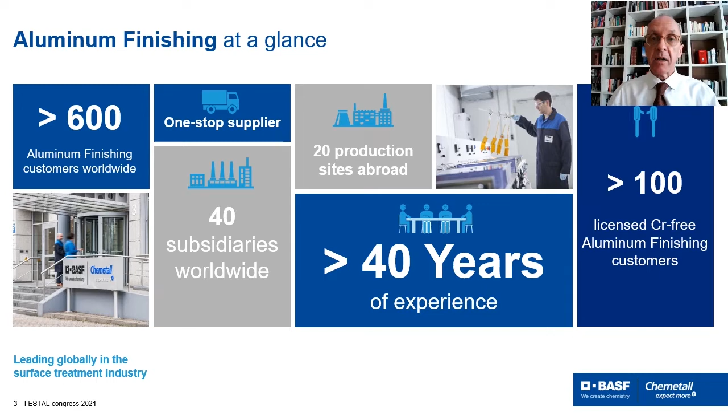I like to thank the actually more than 600 customers worldwide in anodizing and pretreatment prior to powder paint for their cooperation with Chemetall. Since more than 40 years, Chemetall products can be found on the market of aluminum finishing. This success became possible due to our global structure, but with strong regional focus, having 40 subsidiaries worldwide and 20 production sites abroad.

Chemetall's value-added service to the aluminium finishing is the result of involving many interconnected steps, all having some special and necessary function. Due to our wide product range, also for other industrial applications, Chemetall can really be seen as a one-stop supplier.

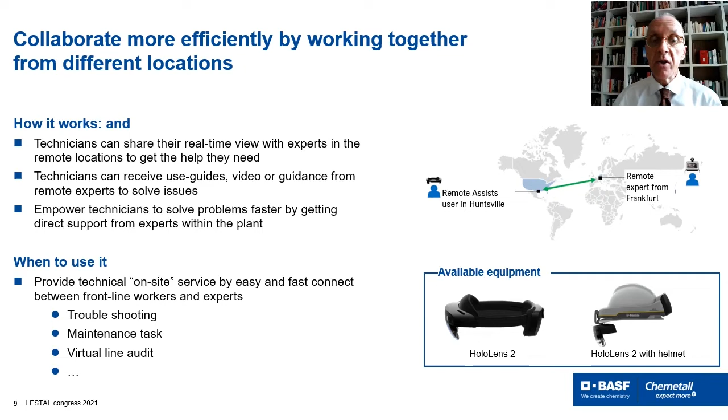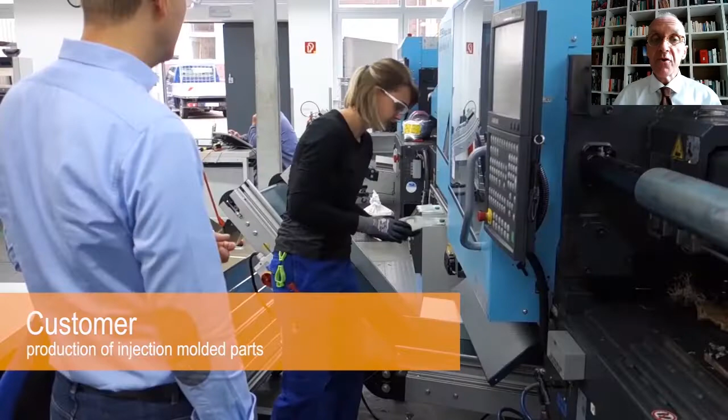You can take advantage of our global but also local support, having 31 laboratories in 23 countries. You may challenge us. Unfortunately, we do not have an example of an aluminum surface treatment line, but please have a look at a short demonstration video which may better explain the idea of remote customer support.

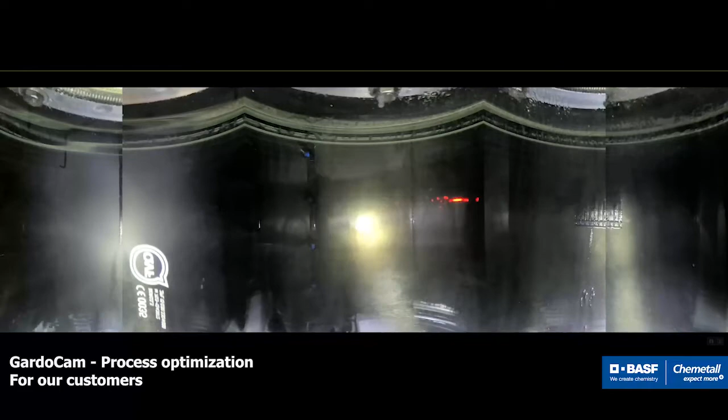I hope the problem of having some non-working spray nozzles could be seen. We do believe such kind of process inspection will help to identify weak points in the treatment process itself. As a consequence, the process can be corrected and optimized, what finally will lead to an increase of production safety and reduction of rework.

This will finally help to reduce rejection rate with all its costs. Besides the economical effect for you, any reduction of rework also helps you to contribute to a more sustainable and more green production in your factory.

This brings me to the next point of the agenda: green product solutions. Maybe the keywords sustainability, carbon footprint, greenfield solutions become a bit boring due to its actual permanent presence. But we have only this one Earth, this beautiful blue planet, and we all must take care of protecting it for us and for future generations.

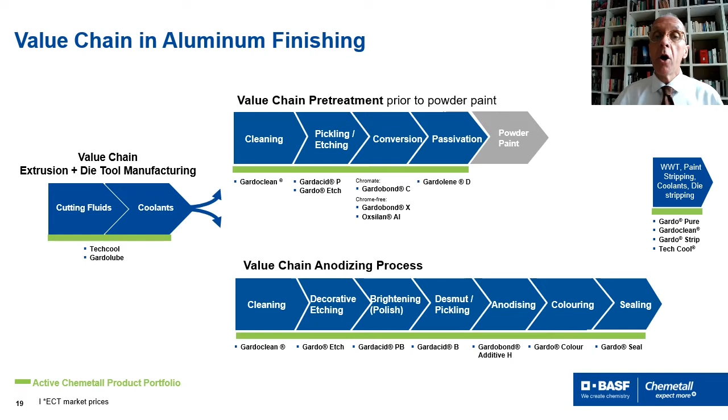Let me give some examples of what we call today's standard. For alkaline non-etch cleaning, borate-free formulations should really be today's standard. Besides that, to have additionally some phosphate-free formulations is a next step and a challenge. But it is already available and successfully in use since some years.

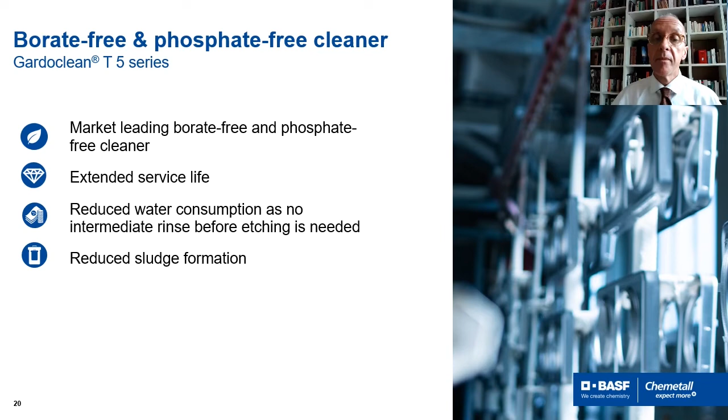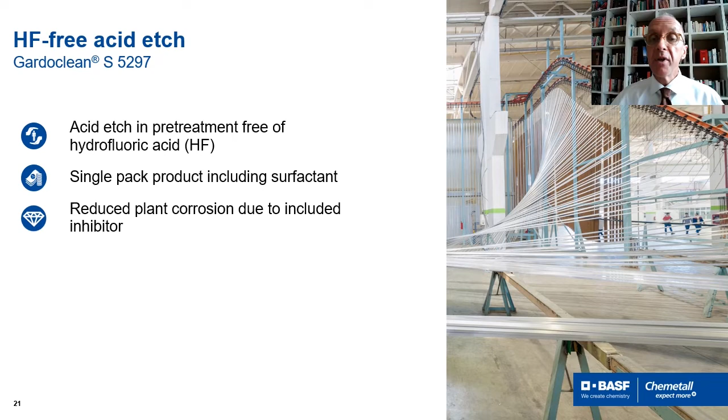Further, the use of special inhibitors helps to reduce the attack on the line material, which finally will reduce your efforts and costs for maintenance.

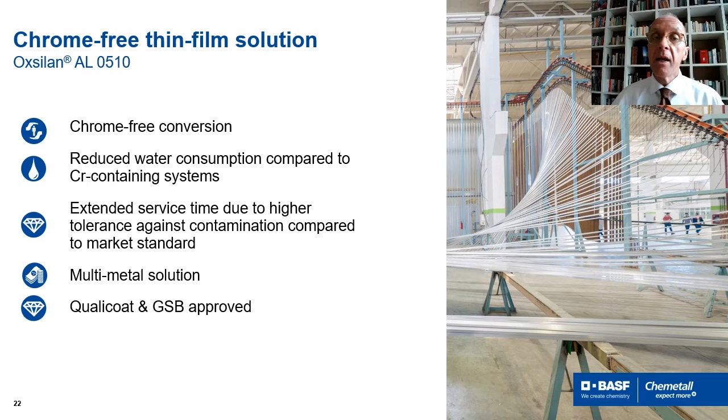Product and process modification in chrome-free conversion in terms of higher tolerance against mass contamination helps to secure the surface quality. Besides that, it will also lead to an extension of bath service life or to a reduction of overflow, which means less wastewater and less total water consumption.

Here I would like to refer to a speech at last ESTAL conference in Istanbul and to remind you of the shown options of possible and significant energy savings, shortening of process time, extension of bath service life with its impact on less wastewater and reduction of sulfuric acid use.

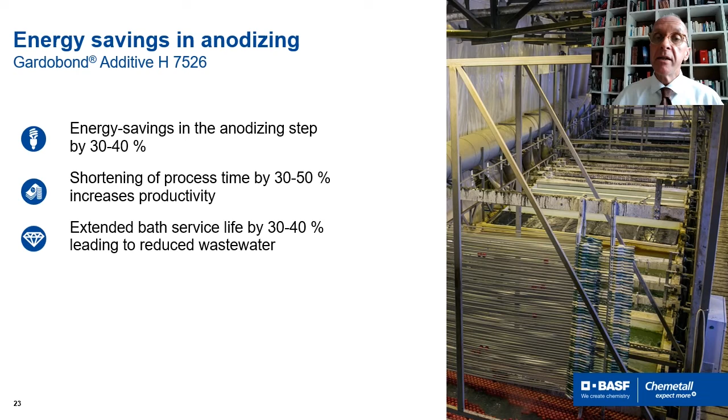Here we talk again about potential and significant energy savings, extension of bath service life, shortened process time, reduced water consumption due to less bath changes. Suitable products are already in operation and quality approved due to Qualanod certification.

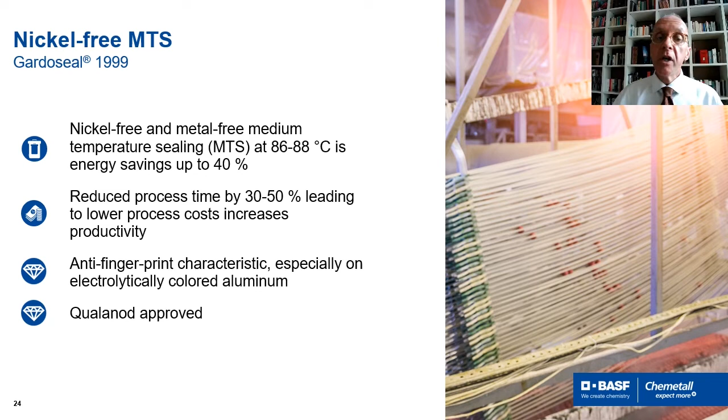Ladies, gentlemen, all these subjects shown before, the HoloLens remote assist, the GardoCam, green product solutions are just some of Chemetall's ideas to help in terms of improved servicing, improved process control and optimization, quality assurance, sustainability.

The markets are more and more looking and asking for consideration of sustainable aspects, lowering the carbon footprint, greener product solutions. You have the options. Chemetall offers ideas and solutions.